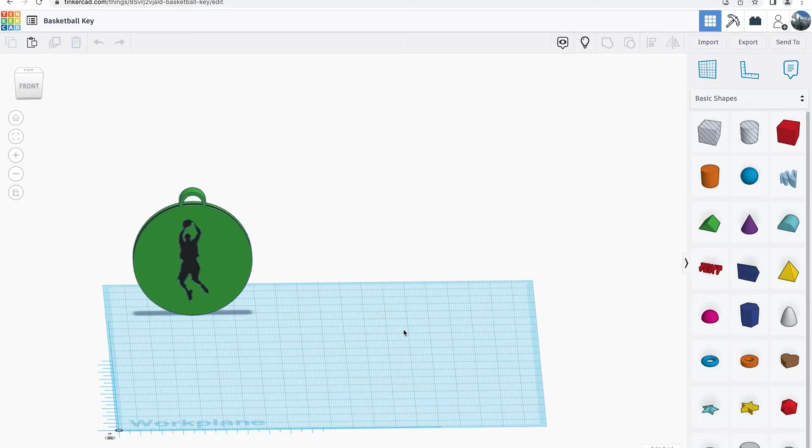Okay, to make this basketball keychain or charm, I will need to start with the cylinder shape. Once I drag that onto the work plane, I will first increase the sides of the cylinder to the max of 64. This makes the circle as smooth as possible. Then I will increase the diameter to 55 millimeters and shrink the height to 6 millimeters.

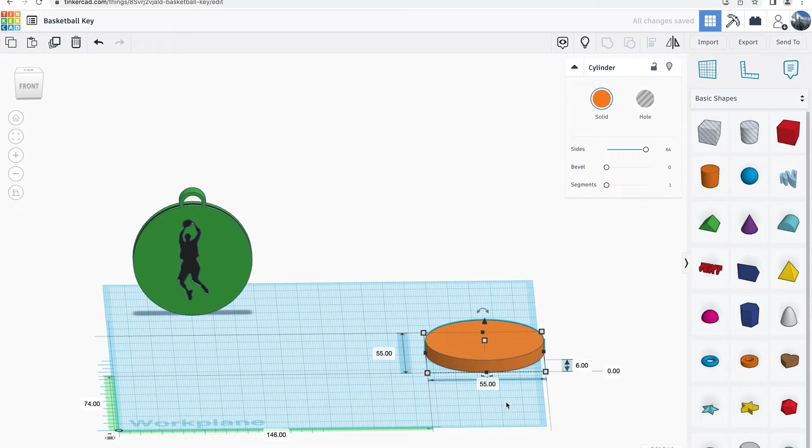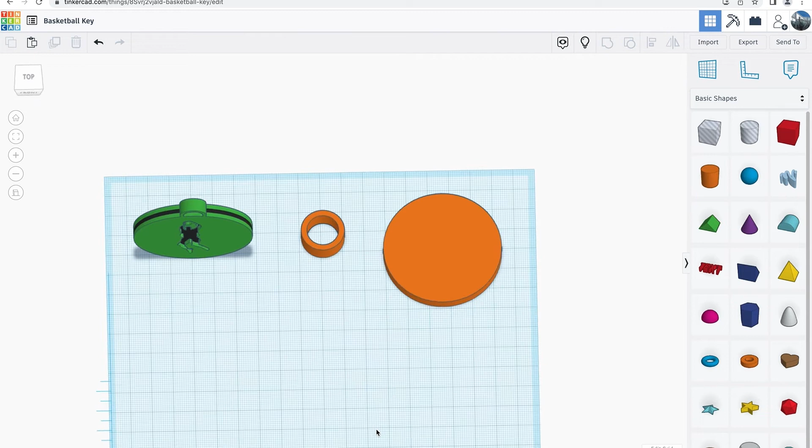Next, I will add the tube shape to my work plane, and just like the cylinder, I will increase the tube sides to the max of 64. Next, I will shrink the tube and scale, keeping the ratio size of dimensions. To do this, I just click and drag in one of those tiny boxes on the shape, and I hold the shift key at the same time.

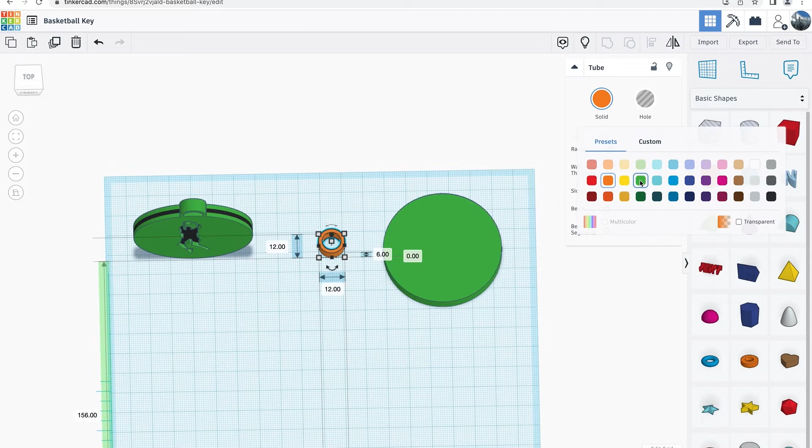So I'm going to shrink this until the height equals 6 millimeters, which is the same height as the cylinder. Okay, now I'm going to change the color of these shapes to green. And then I will duplicate the cylinder, shrink the height to 2 millimeters, and change the color to black.

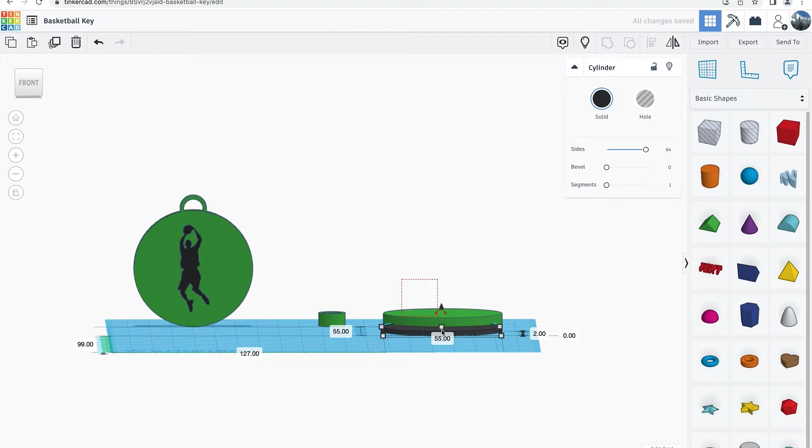In preparation for the insert, I'm going to align this black cylinder with the green cylinder so that I can position the black shape at the vertical center of the green cylinder. To do this, I will select both the black and green cylinders and click the Align button in the menu at the top right of the screen.

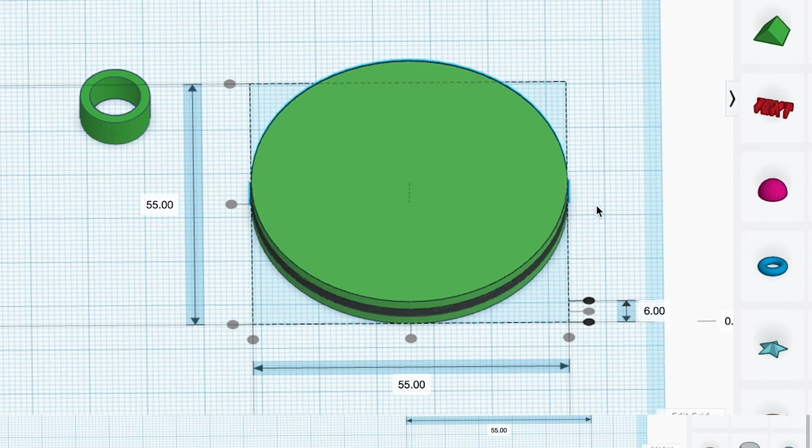You should see a series of 3 dots moving in 3 different directions around the selected cylinders. We need to click all the dots that are in the middle to align the shapes horizontally and vertically. For now, I will move the black cylinder to the side while I go get the basketball silhouette for this design.

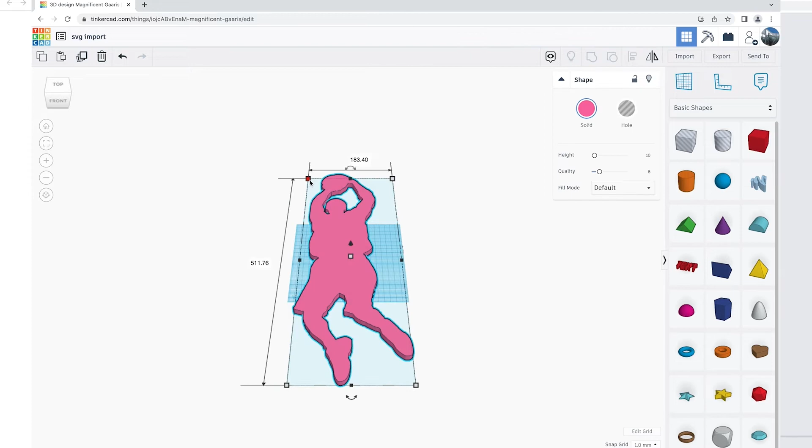Click the Tinkercad icon at the top left of the screen to return to the dashboard. Then go to the Activities section in your classes. There you will find the project examples I created and the design labeled Silhouette, which has a variety of shapes to choose from. I made these designs by importing what are called SVG files, or Scalable Vector Graphics. Basically, I converted a photo file to an SVG file using a free online converter, and then imported that SVG file into Tinkercad.

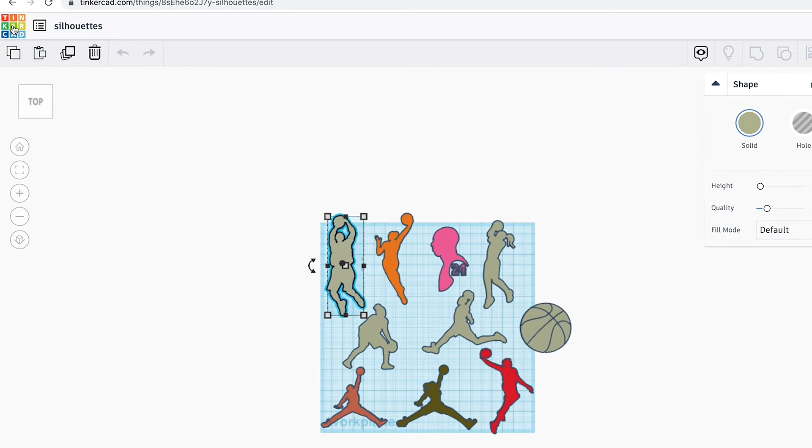But now that I'm in the Silhouettes project, I will copy the basketball silhouette I like by selecting it and clicking the Copy button in the menu at the top left of the screen. Then I will go back to my project by clicking the Tinkercad icon at the top left and returning to the dashboard. Click Paste or Control V once you are back in your project.

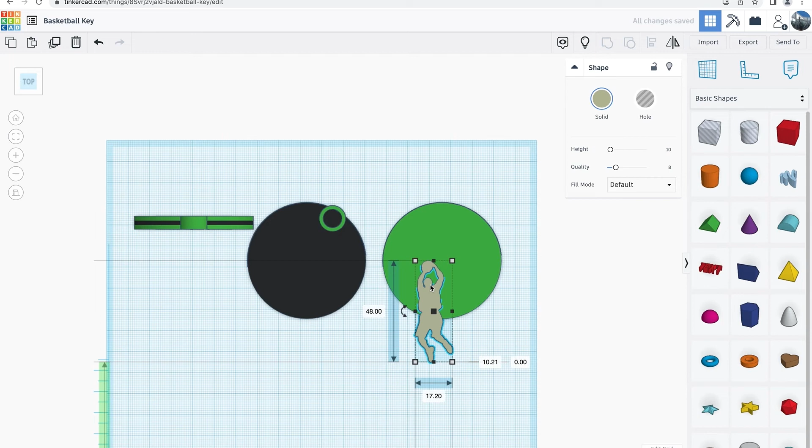Next, I will shrink the silhouette to scale by clicking and dragging one of the tiny boxes on the shape while holding the Shift key. After scaling it to fit inside the green circle, we will change the silhouette from a solid to a hole to make the cutout in the circle.

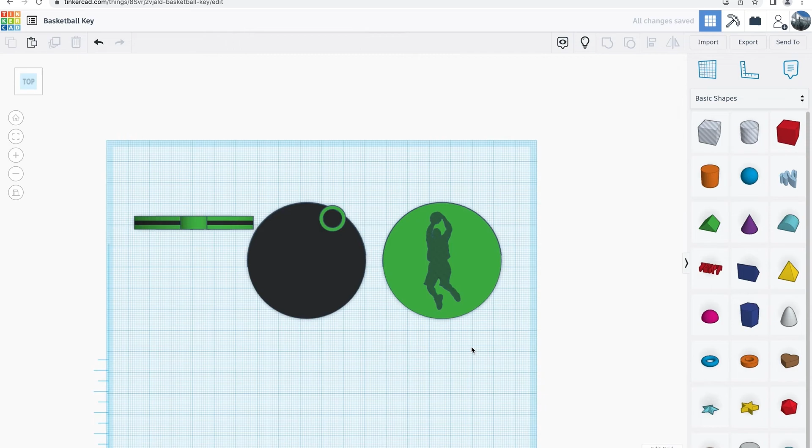Select both the circle and silhouette and click the Align button in the menu at the top to center the shapes. Before we group both shapes, we need to make sure the silhouette is taller than the circle so that we can make a complete cutout through the circle. Then we will select both shapes and click the Group button in the menu at the top.

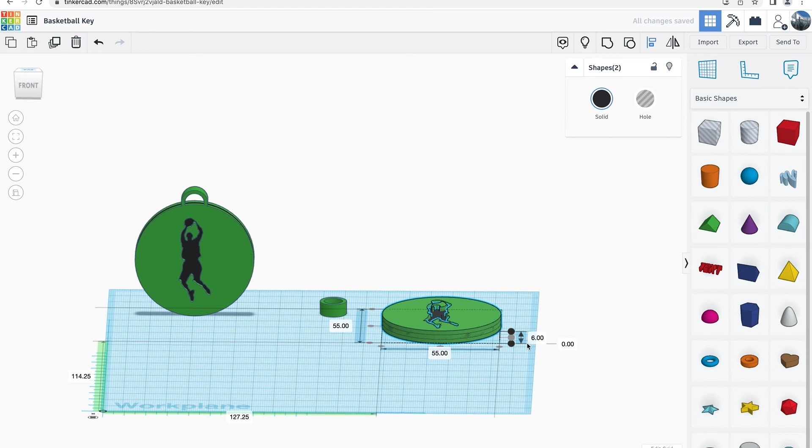And now we'll select the black and green circles and click the Align button to center them in position. Once they are aligned, we will make sure both are still selected and click the Group button to combine them.

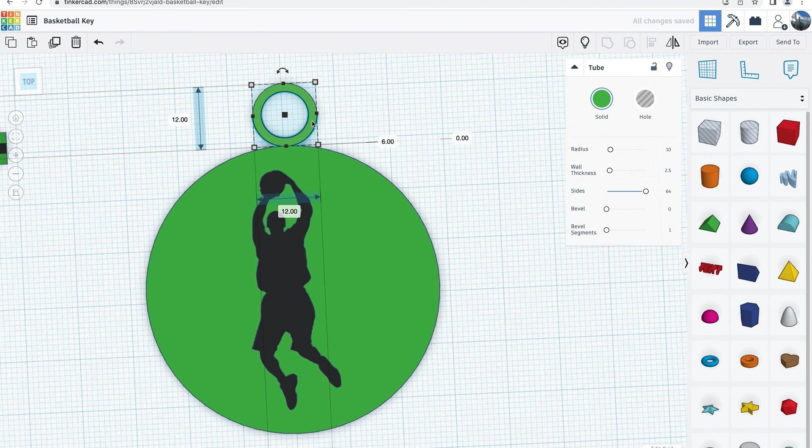Finally, we will align the tube ring at the top center of the circle by once again selecting the 2 objects and clicking the Align button. Then I will use the down arrow key to move the ring down so it makes solid contact with the circle before grouping the 2 objects. Once in place, select both shapes and click the Group button in the menu at the top.

And there you have a nice keychain or charm to wear as a necklace, shoe ornament, or whatever else you can imagine.